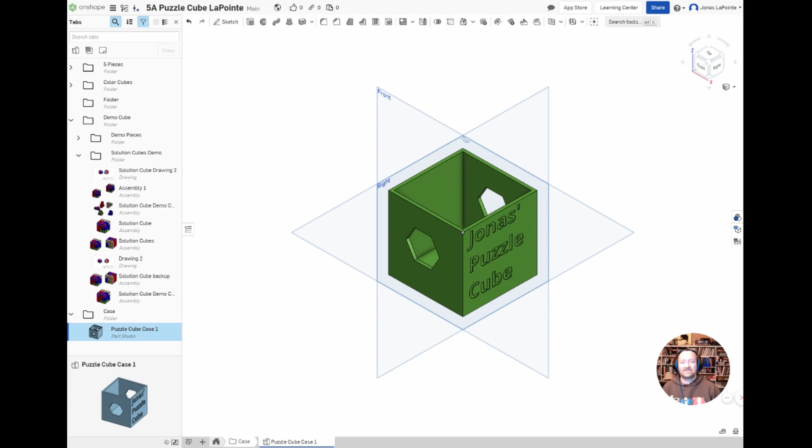Hey everybody, welcome back. Today we're going to make a puzzle cube case. As you can see, I have an example on my screen. You'll notice that it has an engraved name in the case. It has some holes in it. I'm going to rotate this a bit. You can see there's a hole in the bottom as well. And there's reasons for these different things. We're going to make one of these right now for your puzzle cube.

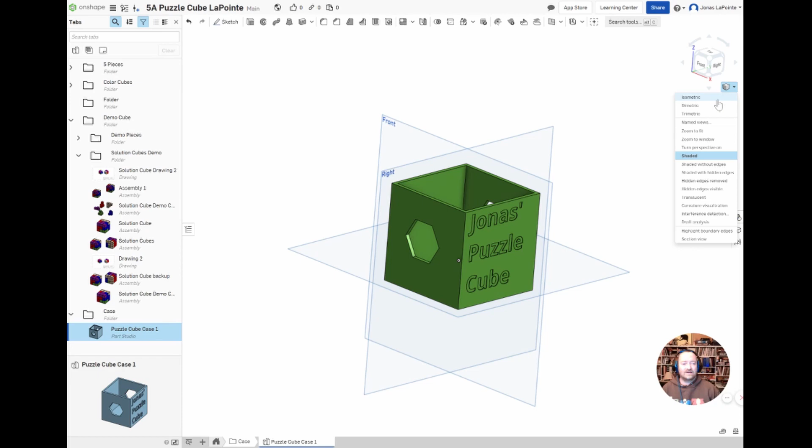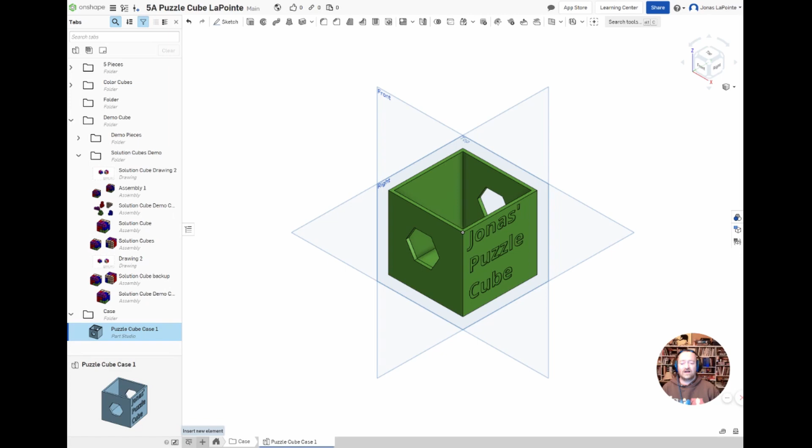The first step is making a new folder called case. Click plus, create folder, and then rename it case. This keeps your things more organized. Now I already have the folder made, so I'm going to make a new file for my part, which is going to become this object on the screen.

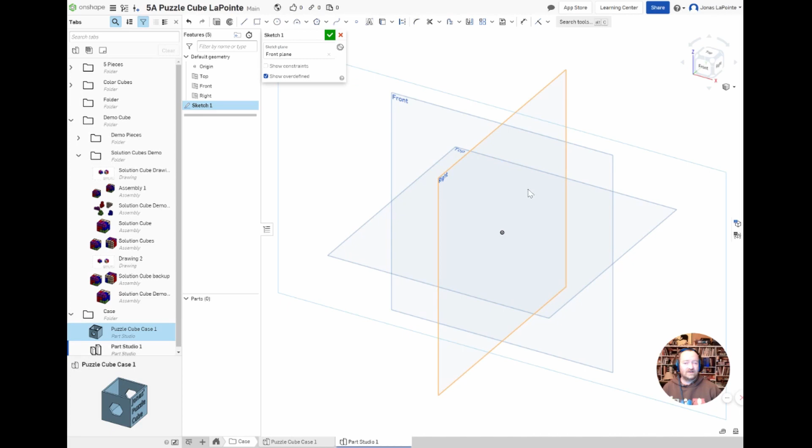So I have a part studio going. Just like we started all of our projects, you click up here to sketch. What plane am I going to work on? I'll click on front, so I'm going to move this up here again, and then rotate this to see the front. I want to choose a corner rectangle, just like we've started every project, and I'm just going to make a square-ish shape and tell it how big to be.

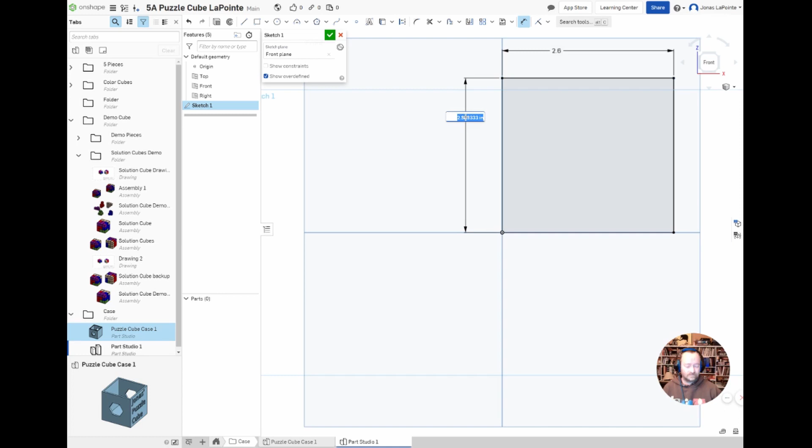Now for this project, to make this work properly with the 3D printers, we're going to make this 2.6 and make it 2.6 square. And we'll finish that sketch. Now we have this 2.6 square two-dimensional shape. I'm going to click on isometric so I can see what I'm doing. And again, going to extrude and the object I want, and I'll also make this 2.6. Now I'm going to finish that off.

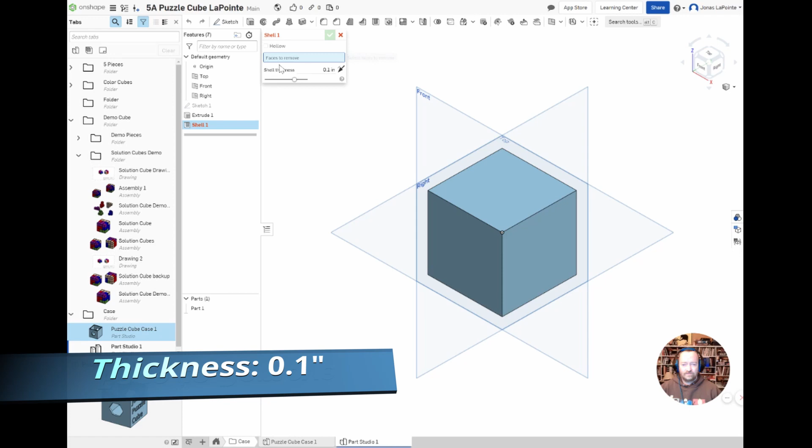Now we're going to use a new tool that we haven't used, which is really cool, called Shell. Shell lives right here. You may have to expand a menu if you have a tight screen, but it looks like this, it says Shell. I'm going to click on the tool. I want to make sure that it says faces to remove, shell thickness 0.1. 0.1 gives us a reasonably solid shell that 3D prints well, and everything's sized for that for this project. I'll click on the top of the box. That's cool. I'm going to finish that up, and I have now made a box with no top that is 2.6 with 0.1 inch thickness walls.

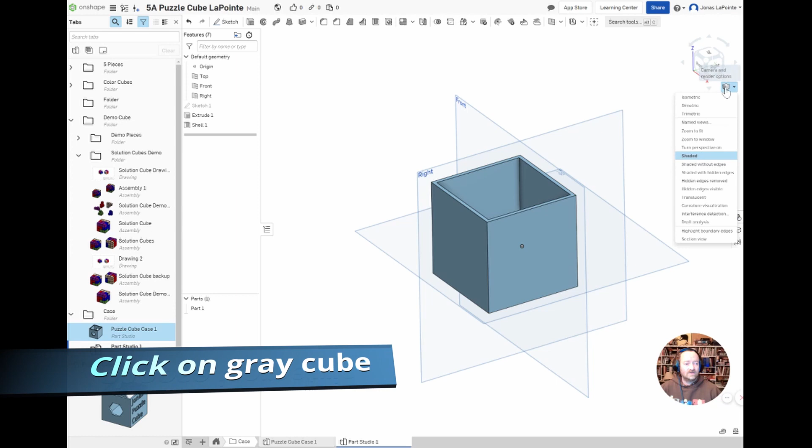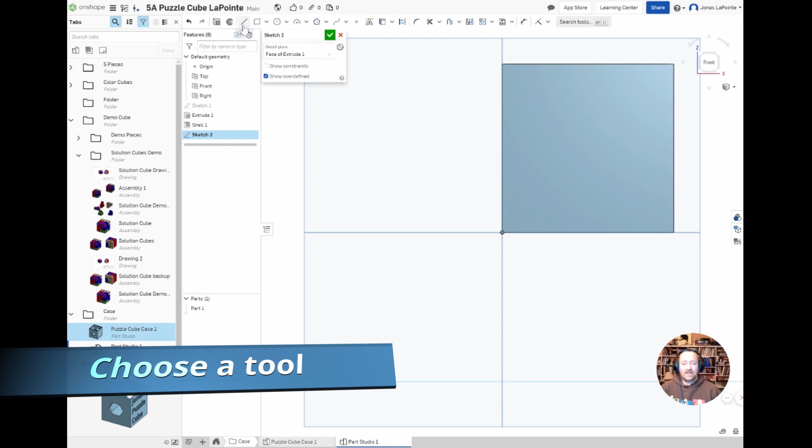I'm going to click back to isometric just to standardize my view. Now I want to make some of those big, interesting holes in the sides. You could kind of draw anything you want. You're going to do a sketch, click on which face you want, and then rotate it that way. In my case, I'm just going to choose this polygon tool. You could choose lines and circles and other shapes and make up a shape that you want, but I'm just going to stick to this because it's pretty straightforward.

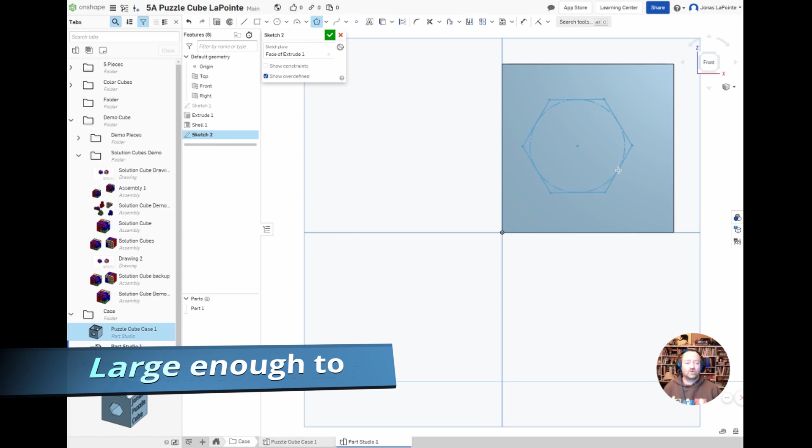Now I want to center this on my side just because I think that looks nice. You could have stuff offset if you want, you could have multiple shapes, but you want something that's reasonably large enough so that you can see the detail of your puzzle cube that's stored inside this. So I'm going to choose this polygon.

And let me just get this squared up. If you notice, when you rotate on the polygon tool, you can increase the number of sides. If you increase a whole bunch, you're going to have a circle. You might as well just use the circle tool, which is fine. I'm just choosing to use this one, 6-sided.

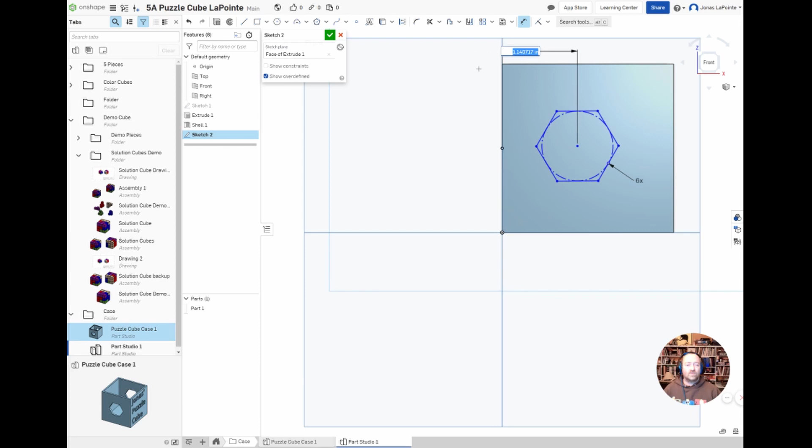Now, one thing you'll notice is I'm not in the center. I want to make this centered by clicking on the center point of this object. And remember, my distance of each side is 2.6, so I want to go 1.3. And don't worry about that part yet.

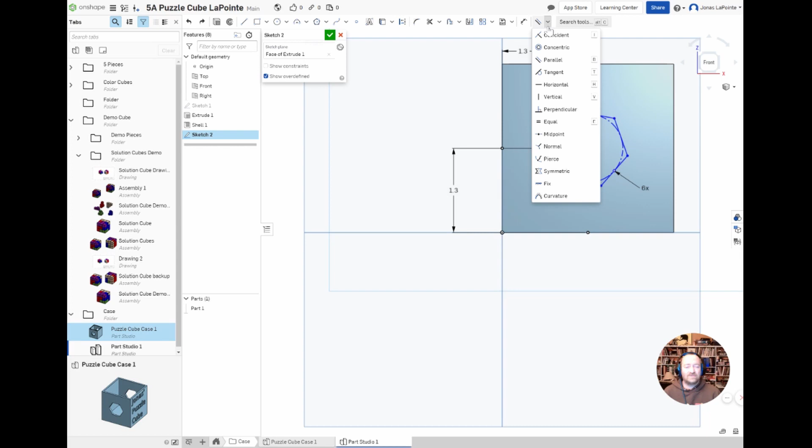1.3. As you can see, my polygon is not rotated maybe the way I might want it. What I can do is there's a little tool here next to your dimensional tool. I can drop this down and pick a different way I can constrain this. I'm going to choose the parallel tool. I'm going to select this face and the top of my box.

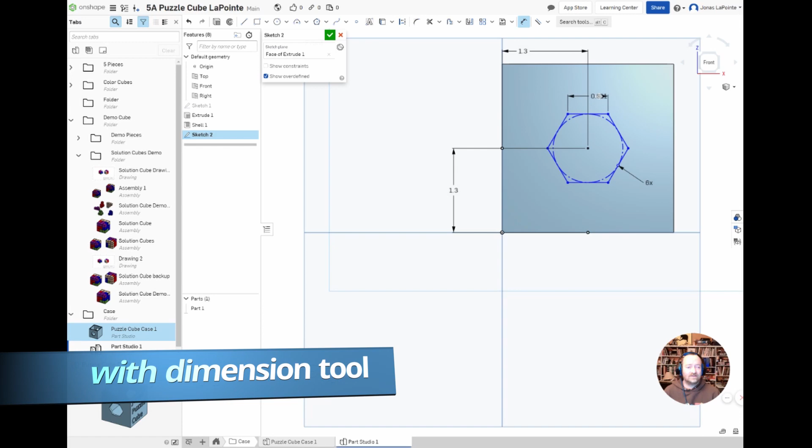And there I go. Now, if you don't like the size of this, you could change how big a side is — it doesn't matter which side on this particular one. But let's just say I want to make this bigger. There you go, everything's uniform.

So that size and shape and position looks good. I'm going to finish this sketch. Now I'm going to use the extrude tool, but this time I'm going to cut it out. I'm going to select the object I just drew, and I'm going to choose remove.

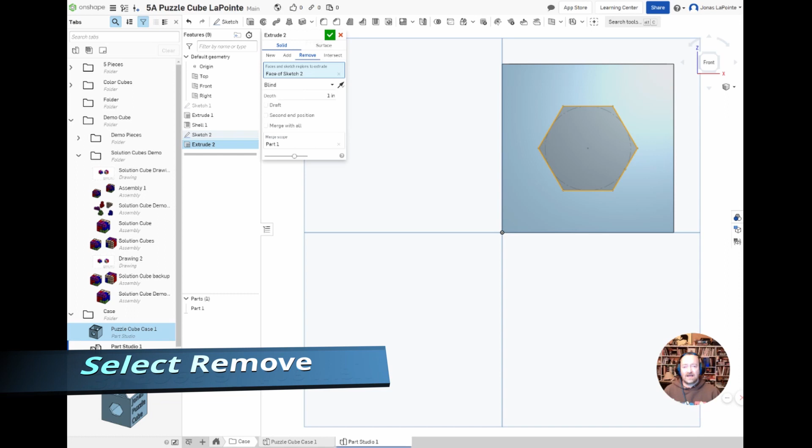I want to punch this through both sides because I think that will look good. You don't have to—you could have a different shape on the other side. I'm going to make sure it goes through the entire cube, which is 2.6. I'll just call this 3, and let's remove that. As you can see, I have a hole that goes through that is a polygon shape.

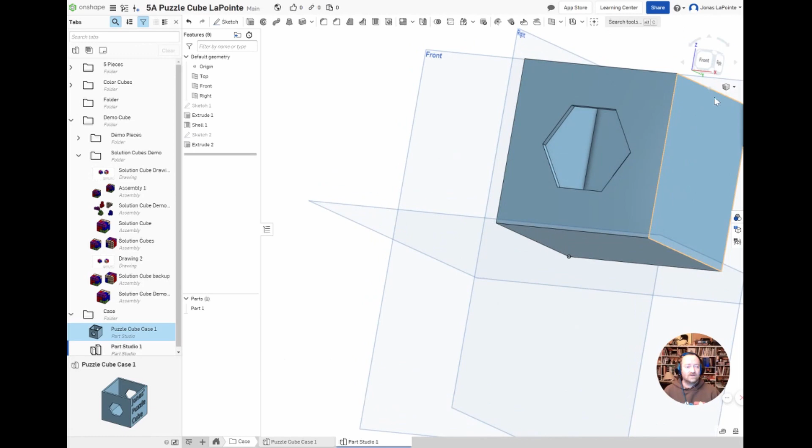Now, if you're ever messing around with stuff and you're like, oh man, where did my stuff go? You can always just click over here, go to isometric, and it will be a nice home view.

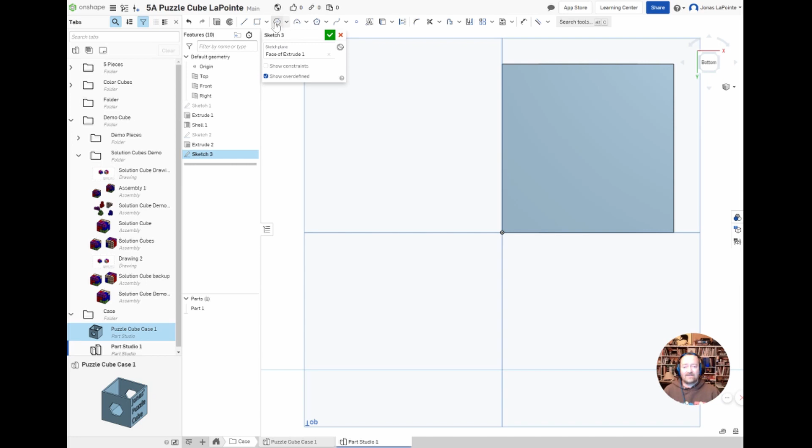Next thing I want to do is put that circle on the bottom. This could be any shape, but I'm finding a circle works well. The main point of the circle is so if your puzzle cube gets jammed in there—say it swells up, gets humid or whatever—you can push it out. It doesn't have to be a circle, but a circle is pretty convenient.

Again, I'll just kind of be somewhere in the middle-ish. It doesn't really matter. I'm going to tell this one how big to be again—I found that 1 inch works good for this. You could change that up whatever you want, as long as it's not too small for you to push through, or too big that the whole thing will fall through. But obviously that's not really going to happen.

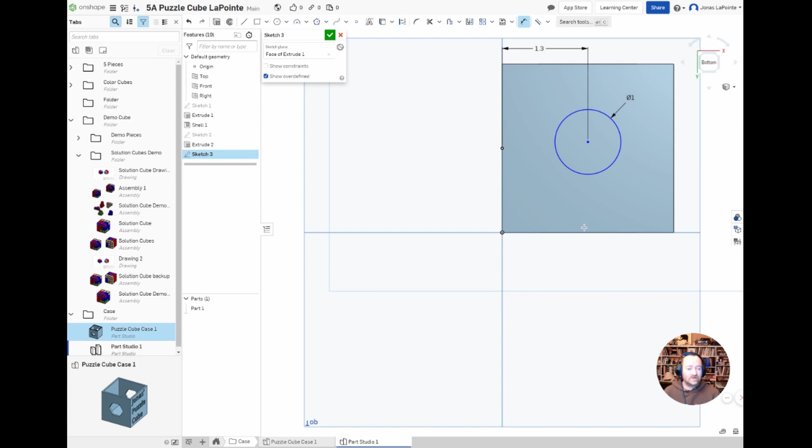Next thing, I will position this. We knew that the whole thing was 2.6, so 1.3 gets us where we want. I also want to go to either a top or bottom edge—same thing, 1.3. Now that's centered, and I'm going to punch this one out too.

And remove. 1 inch is fine because I'm not going through another surface since there's no top. Isometric view—now I've got that nice hole in the bottom.

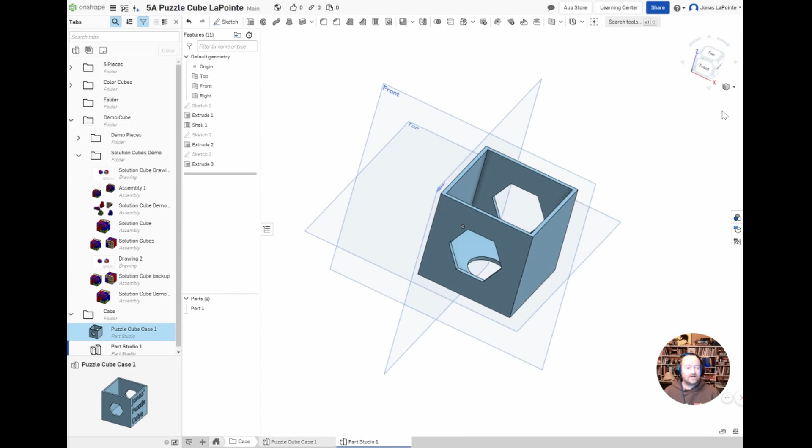So the next thing I want to do is put some letters on this. I'm going to start a sketch, click on a face, rotate to the face, and choose letters.

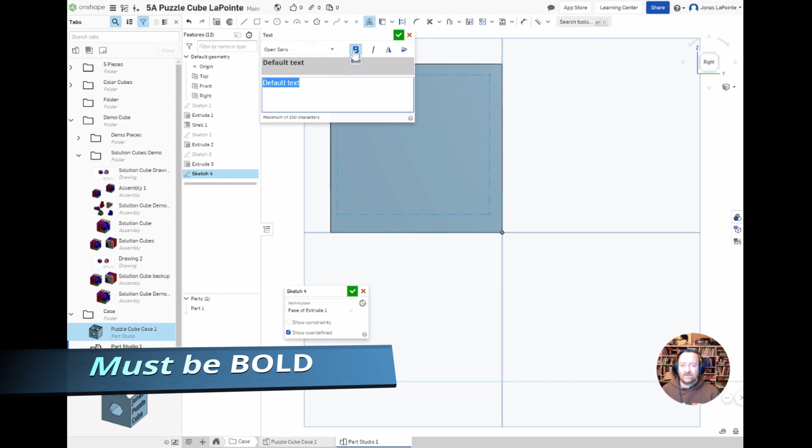Now I'm going to move this because it's going to be in my way for what I'm going to show you next. I'm going to draw out a box here, and I'm going to select bold because when you 3D print, you want text that's not too fine. Otherwise, it will not 3D print very well.

You could choose to change the font, but please don't pick an unusual font. The 3D printer may have trouble rendering it, and it can't be a font that's too thin. So please don't do italics, don't do script or something like that. You want kind of big, chunkier letters if this is going to 3D print out well.

So I'm going to type in what I want on this cube. For this project, I will specify in the instructions what you have to have. You do have to have your name on it. I'm probably going to have you have your class period on it—I have to be able to give these back to you guys and know whose they go to. So this is looking good for my example.

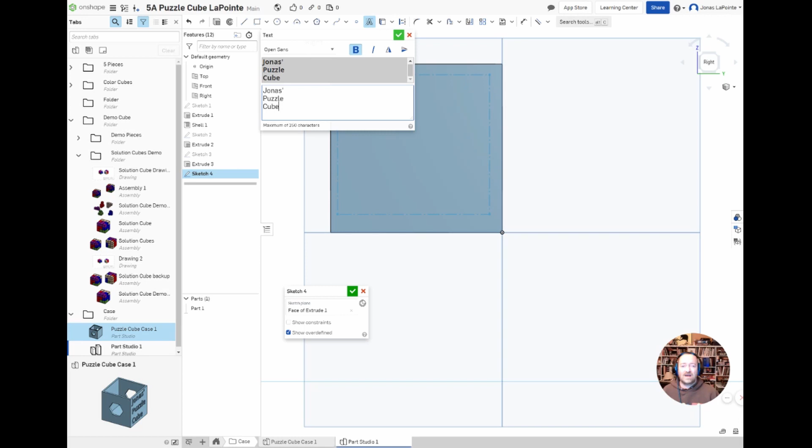I'm going to click this green check. But before I do—after I click this check, it's going to be huge and look weird. It's fine. I'm going to walk you through the steps for how we're going to resize it and make it where we want.

So there we go. First thing I want to do is see how this corner is up near the corner of this. I want to lock it in space. Okay, as you can see, it's just too big.

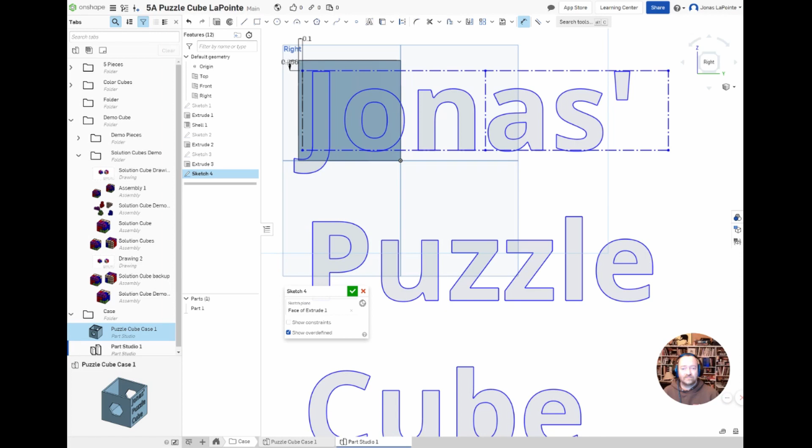So what I'm going to do here is resize this. First thing I will do is specify how far it is from that edge. I'll call it 0.1. Also going to do the same from here to the top, 0.1. And now, since I've locked this in space, I can edit these later at any point.

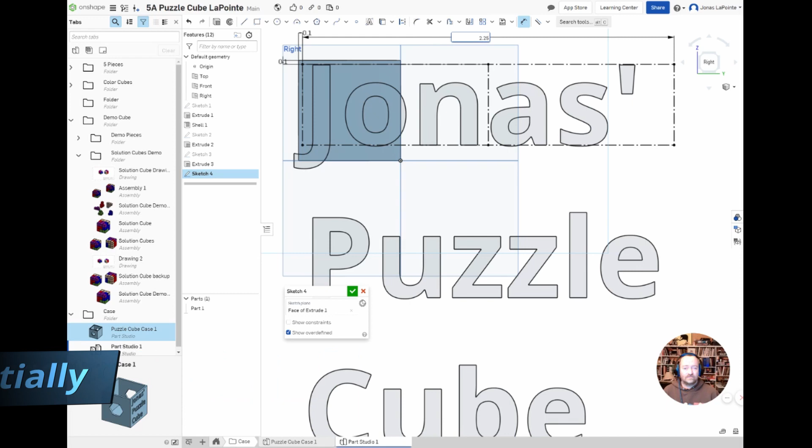I'm going to say how big the whole thing is. For the width of this, I have to fit it on the side of my cube, and the cube is 2.6. So maybe let's try 2.25. And that looks like it fits pretty well.

Depending on what you've typed here, you may need to resize that, and that's fine. I want to probably kick this over - it's personal preference. I'm going to kick this over here a little bit using this one. I'll call this maybe 0.2, and I'll zoom back in.

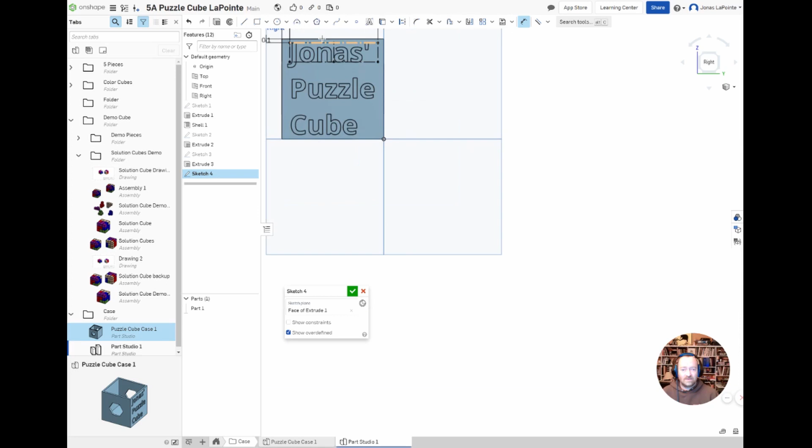I'm good with that, I think that will be fine. I will green check that. I'm going to go isometric to see what I'm doing. I'll zoom in just for you so you can see it better.

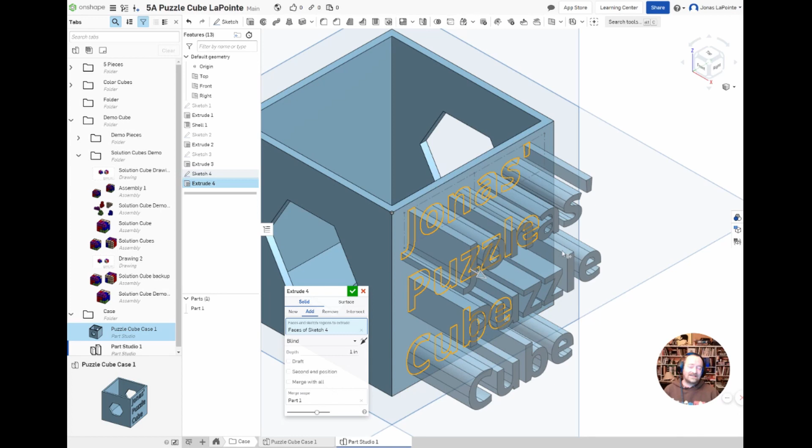I'm going to click on extrude, click on my letters, and I do not want to cut these all the way out. If I do, it's going to 3D print wrong. I don't want to have these sticking out either, because that's going to really slow down the 3D printing and also maybe cause some bits to fall off.

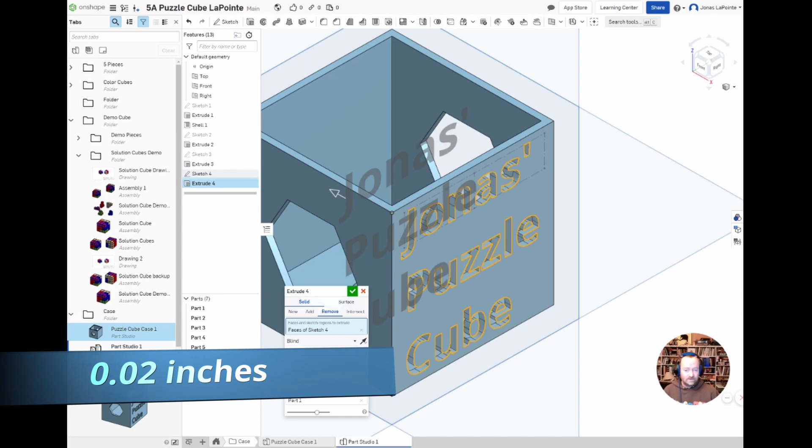So for this process, we're just going to recess them slightly. I'm going to go to remove, but instead of 1 inch, remember my walls are 0.1, I'll try 0.02 and we'll check that out. So if I look at 0.02, they're recessed, but they still leave plenty of strength on the wall, and I've gotten this to really show up.

Now I'm going to just close this menu to give you guys some more space so you can see what's going on. I'm going to click on isometric.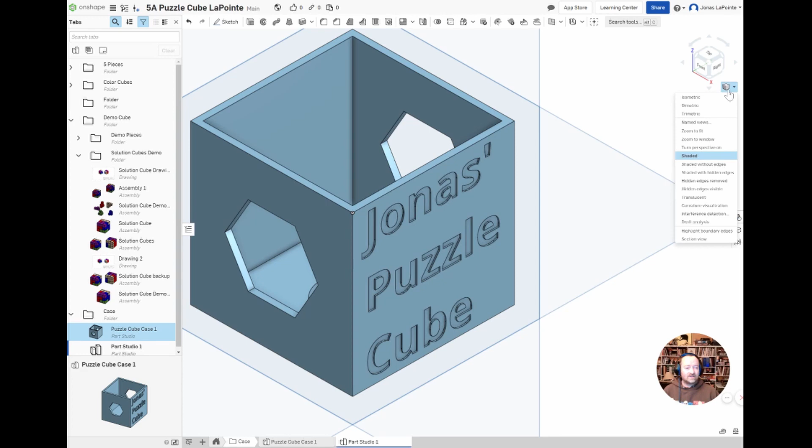Now for this project, I'm going to give you guys a list of what colors are available. If I get your project towards the beginning, not right up at the end of the project, I might have some leeway, and hey, the 3D printer is set up with a color you want, I'll try to print that for you if I can.

So if you make it the color, it'll show up in your drawing and we can kind of go from there. I may run out of colors, I may have a whole bunch to do and I just have room on a 3D printer and it's going to be a certain color, but I'll do what I can, especially for the ones that get done on the early side of the project.

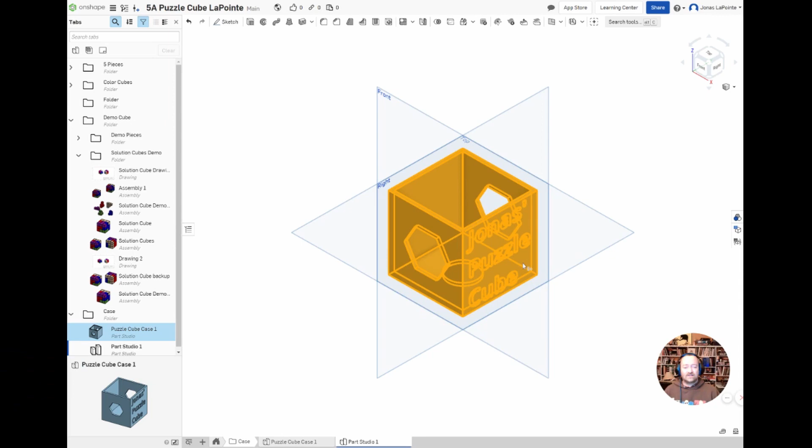So to specify the color, you're going to click and drag to select, right click and choose edit appearance, and pick the color that you think you want. There's different shades - don't worry about the shade, because for the 3D printing colors, there's usually just a solid color I have.

As long as it's clearly indicated, like if I say I want a purple one, any of these will be fine. I'm just going to click this one. If I see that, I know you want purple. If I have purple, I will try to give it to you.

So there you go, that is the Puzzle Cube case. These are going to have a lid. I'm going to just provide you with a lid for the color that you have selected. It's going to be a generic lid that fits, recesses, has a top that fits down inside there so it can't fall off and slide.

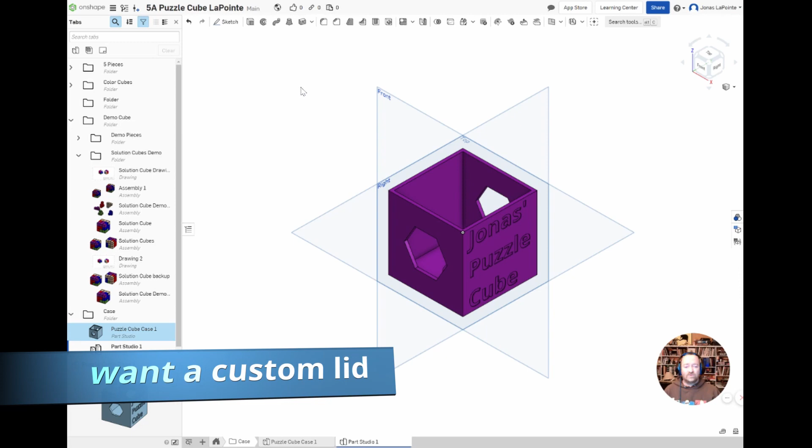If you wanted a custom lid, you can check in with me. I can give you the specs for that and you can customize it. But at this point, you are done with this part of the project. The next step will be making the drawing, which I'll post later.